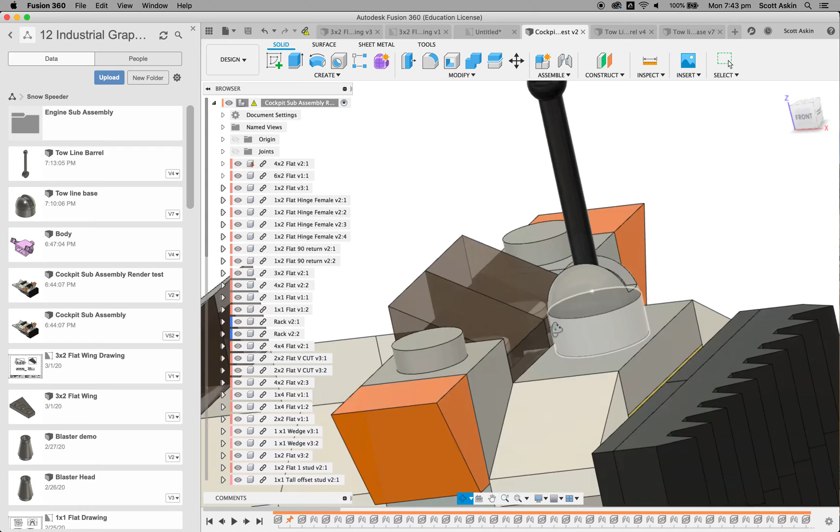This one's going to show how we draw the second part to this, and I call it the tow line launcher. Just go back to the assembly here. You can see there it is on the back of my snow speeder.

So last lesson we drew this base section here in white, and now we're going to draw this. I'm going to call it the tow line barrel in black. So we need to draw that individually. You can see here's one I've drawn before, and if we just use the timeline once again to roll back, you'll see how I went about drawing this to give you an idea. Grab the timeline, move it back one, you can see that I'd revolved.

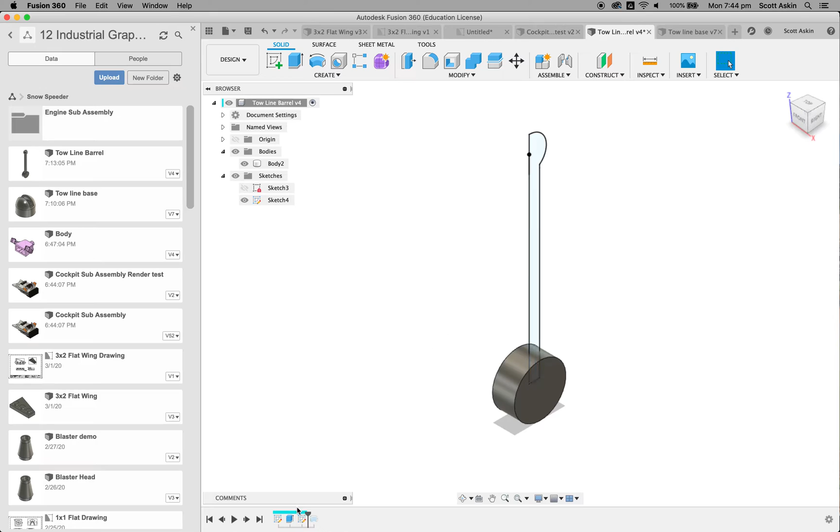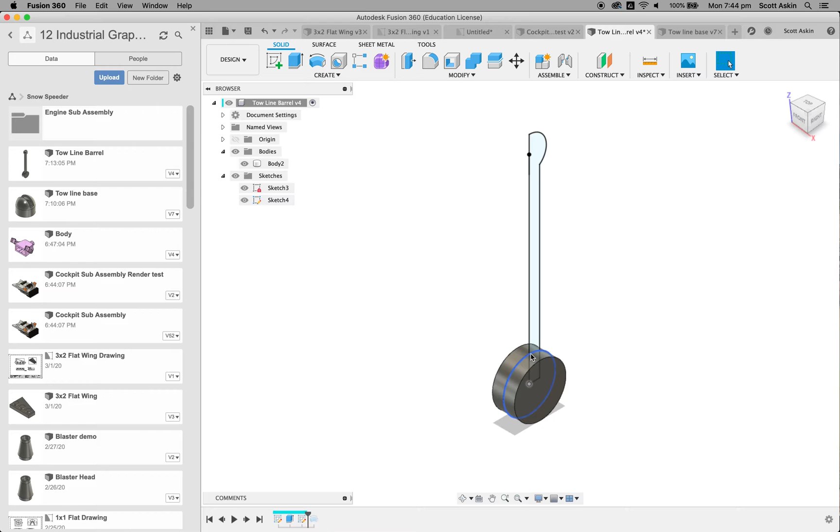That might be better to go right back to the beginning and show you where I started. I'll just turn the sketch on. So I started with a circle, then extruded it, and you'll notice I extruded it in equal distance both sides of the original sketch. Then drew another sketch on that same plane through the center, and then revolved that sketch to give me the barrel shape.

So we'll do exactly what I've just done there with a new design. Let's go File, New Design. Straight away let's save that thing. What do I call it? Tow line barrel. That sounds good. Make sure it's in the right folder.

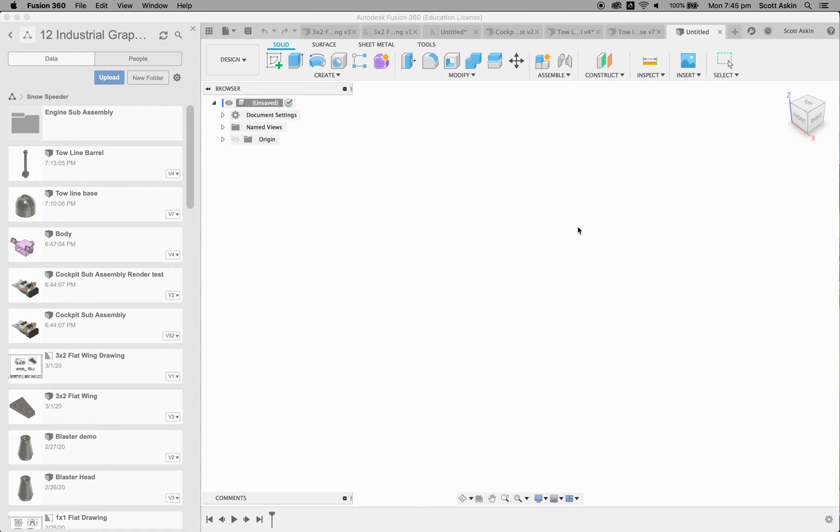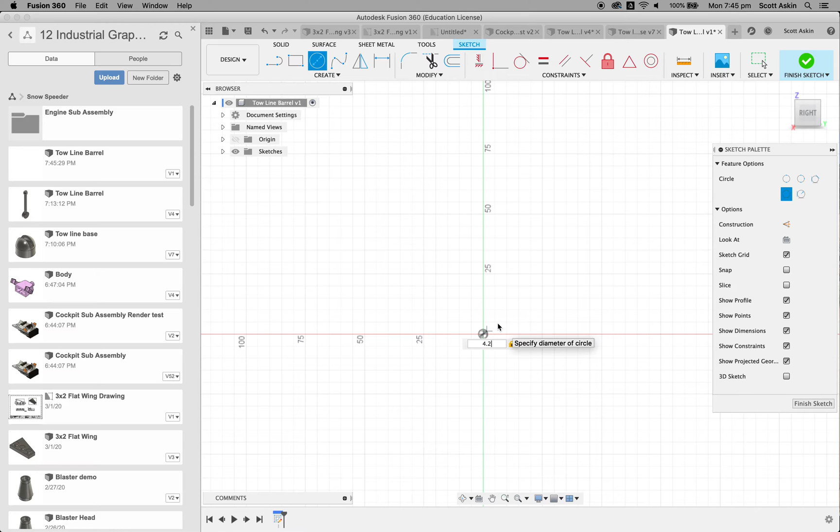Click on Save and go to your sketch icon and choose the vertical plane, and let's put a circle on there. Always start in the center and drag it out, and I can tell you that the diameter of that circle down the bottom of that cylinder is 4.2. So punch that in, and then zoom in on that so you've got the right sort of scale, and then finish that sketch.

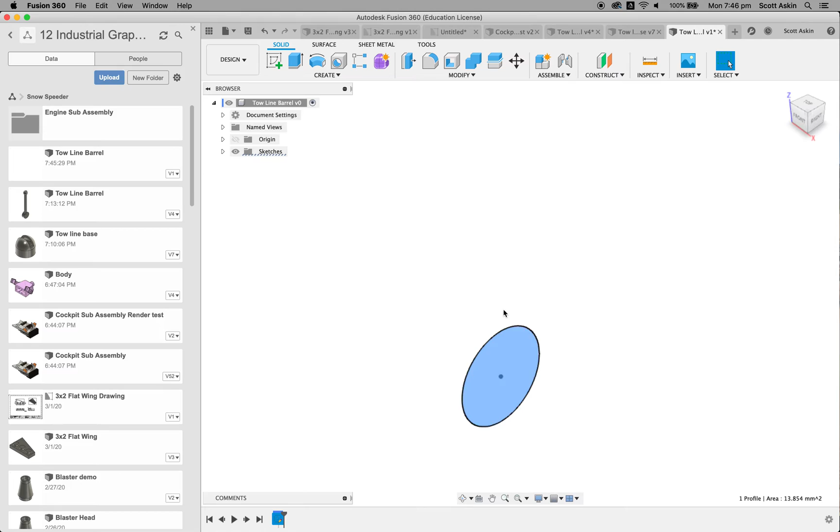I always like to go to 3D view by clicking on home there, and we're going to now extrude this circle and make a cylinder, but because we're going to be drawing on the center of this later on, rather than extruding it like left or right, we're going to extrude it symmetrical, so the same amount left and right. So select the profile, come up to the extrude button like you normally would do, and when you come to this part about direction, change it from one side to symmetrical.

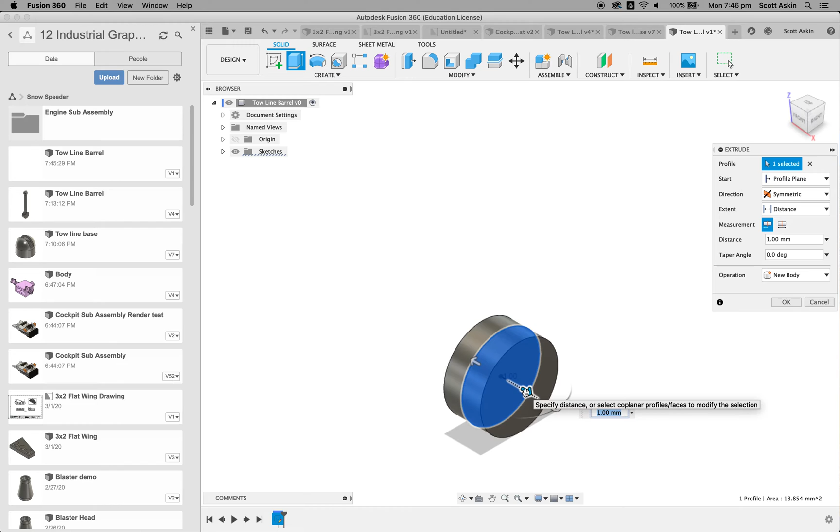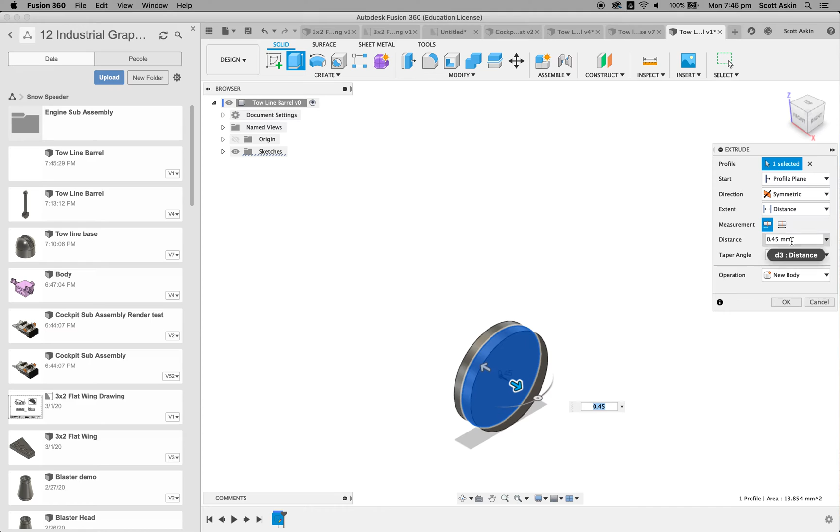As you can see here, as I move the arrow on one side, it repeats the same on the other side. So to give us a thickness in total of 0.9, that's going to be 0.45 in distance. So 0.45, I think that's going to give me a distance of 0.9, or is that the overall distance? Now let's see if it's fine. Let's see what happens. Yeah, okay, let's try that. So I'll click enter. I think that's the right size.

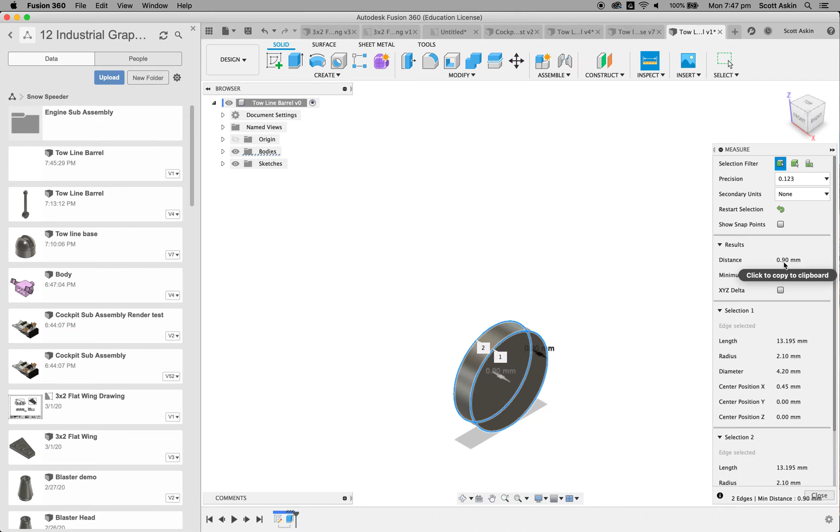Let me just check. So we go to the inspect tool here, and then I can click onto this circle to this circle, and it tells me that that distance is 0.9, which is correct. So there's a really handy tool to use, the inspect tool. Inspect, measure. Don't worry about all those ones down here, but that's a really handy tool. You can measure stuff on the fly.

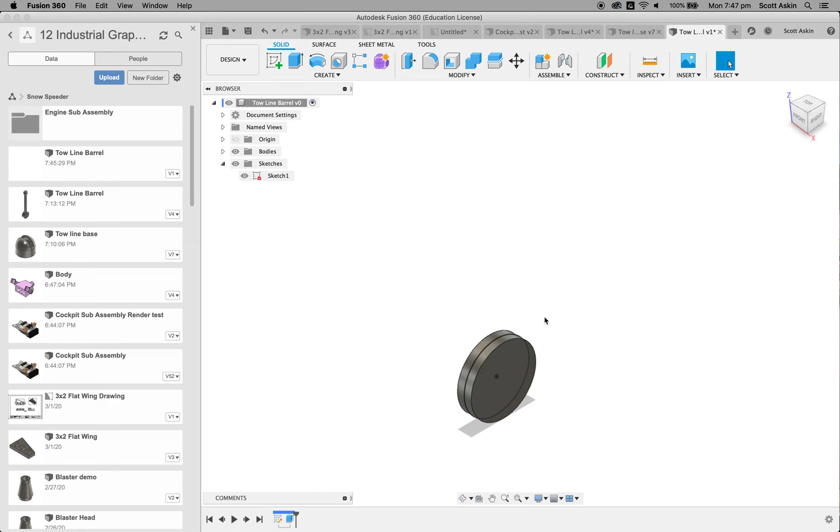Alright, so there's the first part of that cylinder. I might just turn that sketch back on so I can see. And the reason I turned that back on, by going to sketches and you turn sketches off and on, you can see now the black line, I should say, which represents the original work plane.

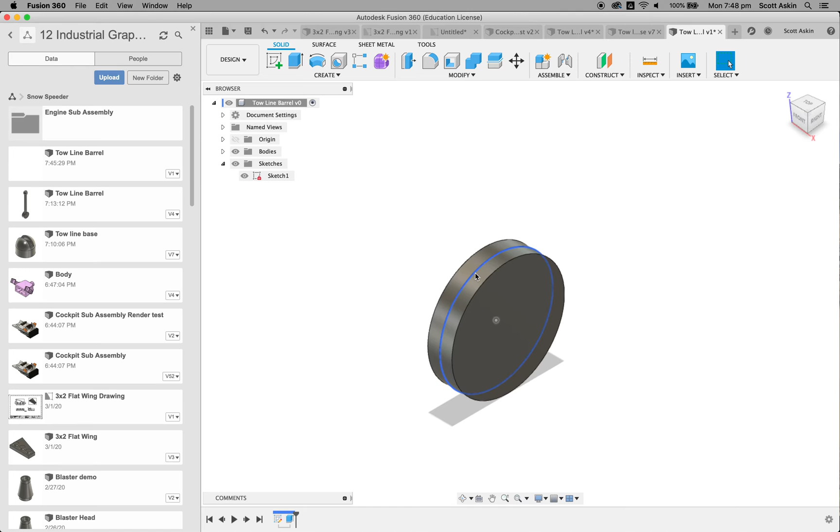So now I'm going to draw the second part. I'll start back to the one I've already finished, and you can see we started off with this thick cylinder, and then we've revolved this other section on top of it. So if we go back to our drawing, let's choose the plane in the center like so, click on sketch, and let's start putting in a profile that we can revolve to create the barrel shape.

So using your line tool, come from the center of the object and come up a distance of 16 millimeters, the length of that line. And on the end of that line, I want you to put in a circle with a diameter of 2.8.

Once again, all these sizes I got by measuring the object with calipers. So a diameter of 2.8. Remember, this works always in diameter.

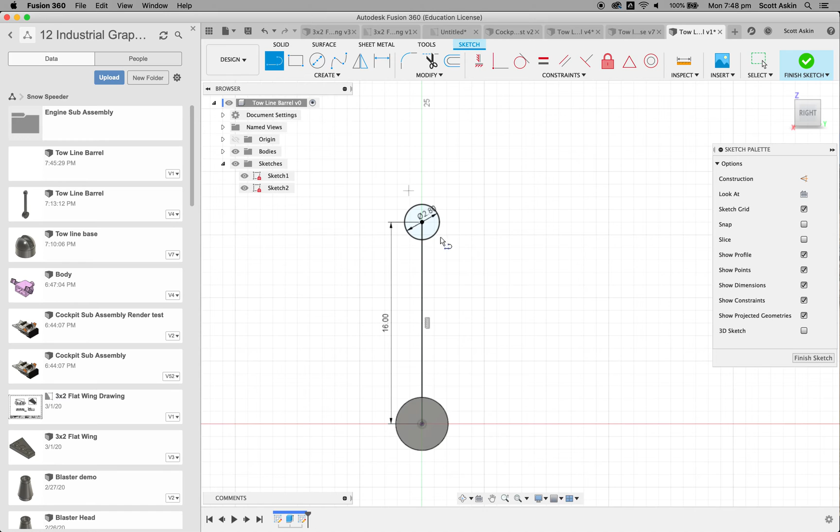I'm going to draw another line parallel to the first line, starting it somewhere down here in space. Actually, I need to draw a line a certain length here first. So draw that line in, find out what dimension that line is, and set that dimension to 0.85.

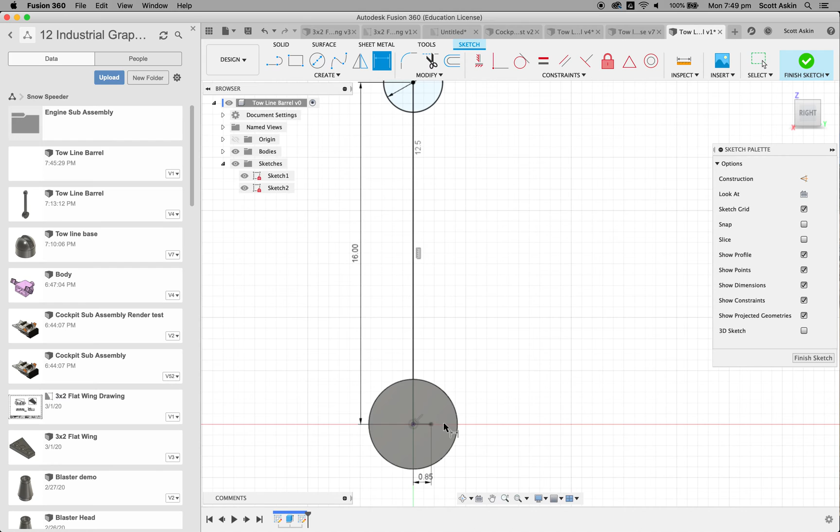From the end of that line, click once, then come up and let it snap onto the edge of the circle. You can see that cross comes up, which means it's snapping to it, and that should be sufficient.

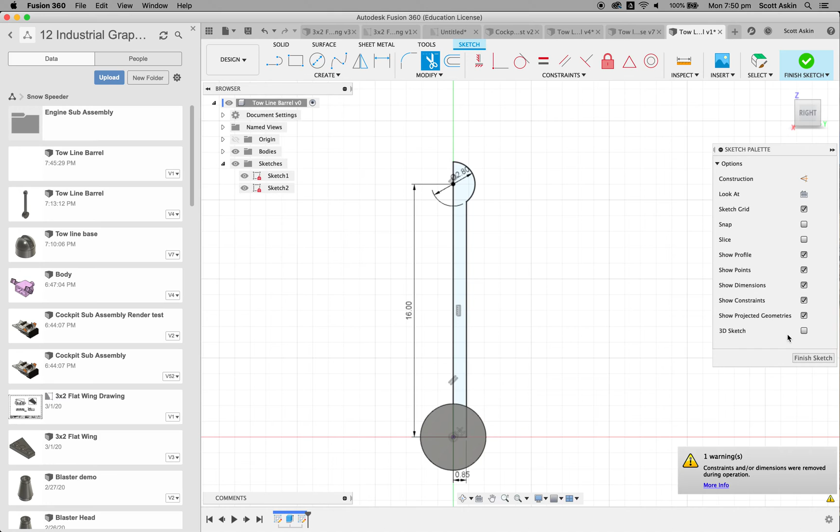Now what we need to revolve here is only half of the object. So I'm going to continue drawing another line from the center of the circle to the top of the circle, then use the trim tool by pushing T. I'll get rid of that half of the circle and this little section inside here, which leaves me with this closed profile which I can now revolve. So we'll finish the sketch at that point.

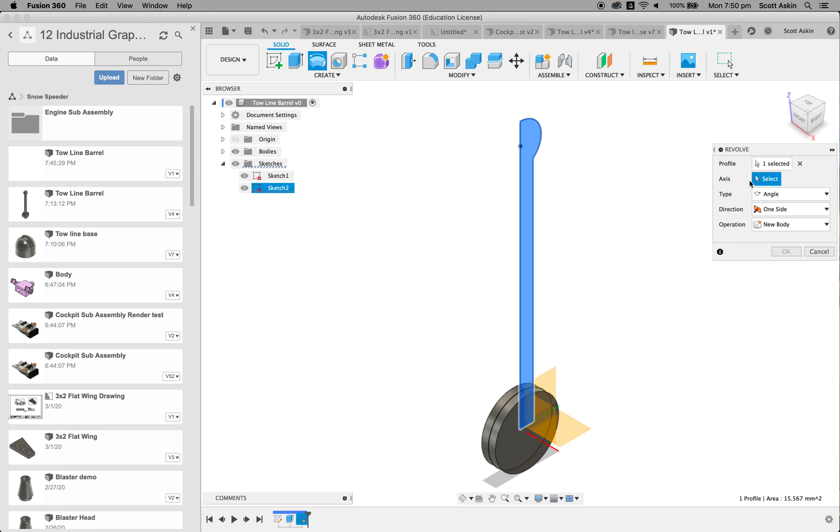I like to turn things 3D, and you can see there's the sketch. I've highlighted it, come up to the revolve tool like we've done before, and it's asking for the axis. Now you can see the profile has been selected.

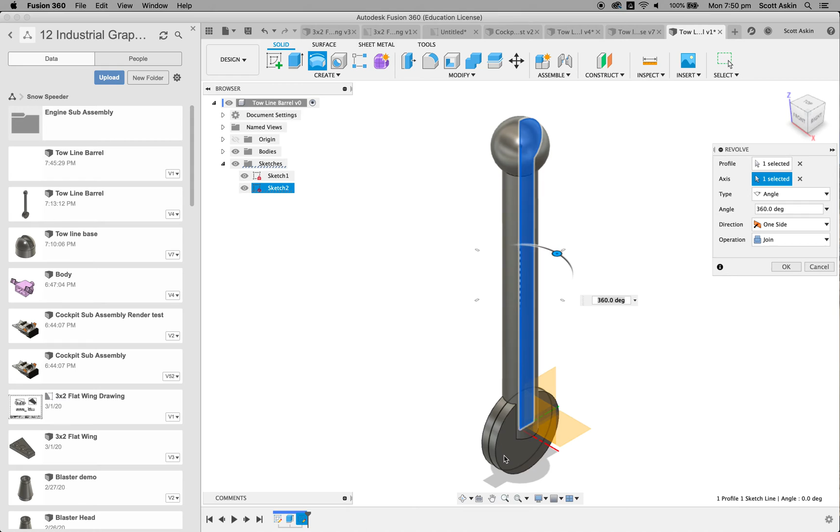Click into the axis box and choose that center line as the axis. It gives you the preview in red. At the moment it's saying cut, but we don't want it to be cut, we want it to be joined, which changes it from red to that blue and grey colour. I can see I've got an error with my original cylinder - I'll have to go back and fix that later on. So click OK.

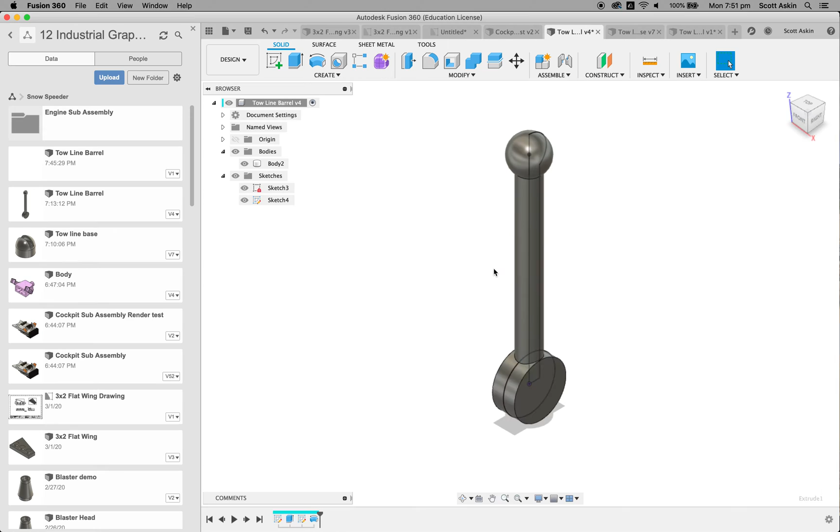The barrel's part is correct, but looking here, that cylinder down the bottom is definitely not the right width. So I'm going to go back to my drawing to find out what width this cylinder was, back to that extrusion. Actually, better still, rather than do that, I'm going to measure it. I'll click on one side, click on the other, and if you look at the distance, it's 0.9. So there's my mistake - that was 0.9 from either side, 1.8 in total.

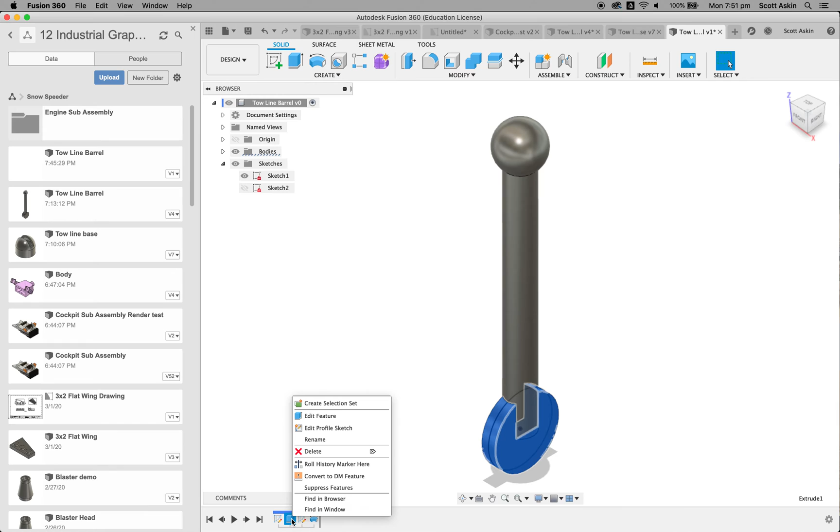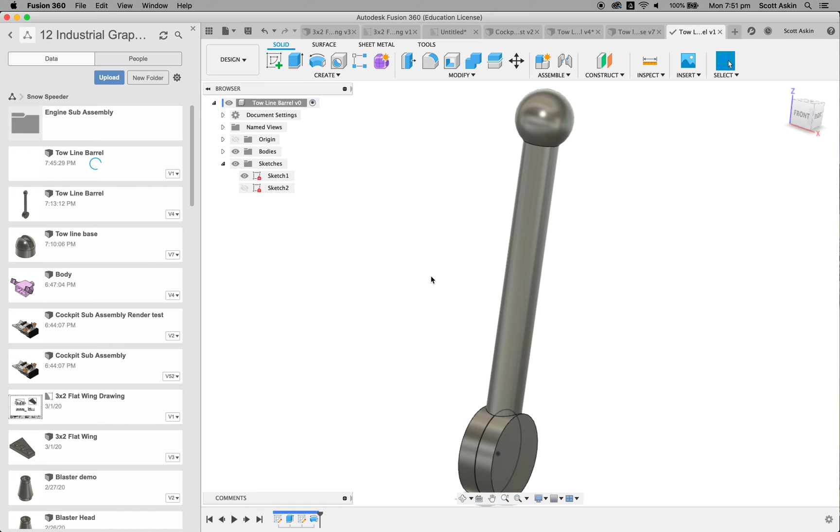So I need to edit this extrusion here now. If I go back, you can see I'm highlighting the extrusion in the timeline. I right click, edit, and up here, instead of it being 0.45, it needs to be 0.9. Click OK, and now we can see we've got the correct thickness. Alright, so hit save, and that's that part done.

We might as well just assemble these now together so we can put them both together. So to create a sub-assembly of two parts, you always start with a blank file. Never start with the part you've just drawn and add parts to it, because it won't arrange those correctly in the drawing. So file, new, so you've got a totally blank page if you like.

Then come over to your library and right click on the parts that you want to insert. So right click on the tow line base, insert into current design. Okay, it's asking me to save that before I can insert it, so I just need to find it up here. There it is. I hadn't saved it. Oh okay, maybe I had saved it.

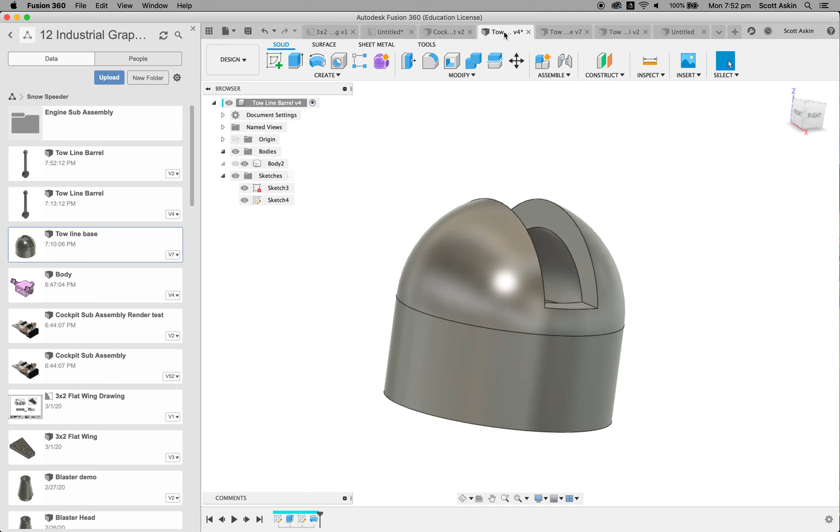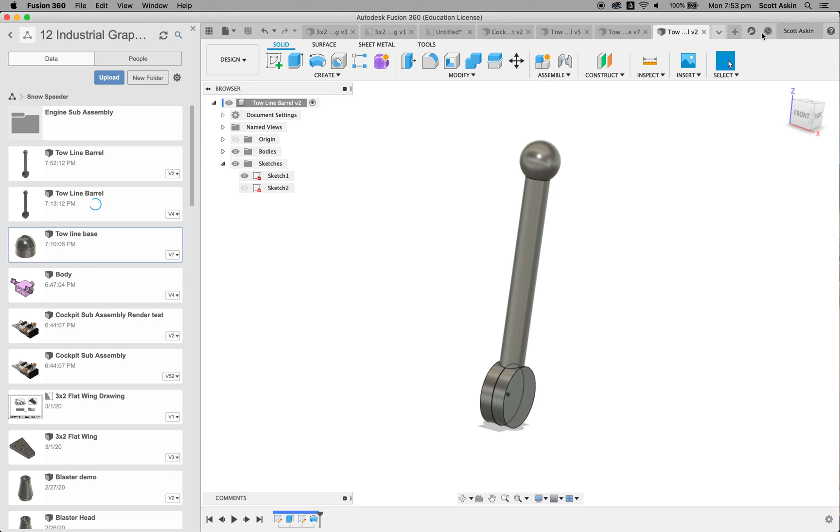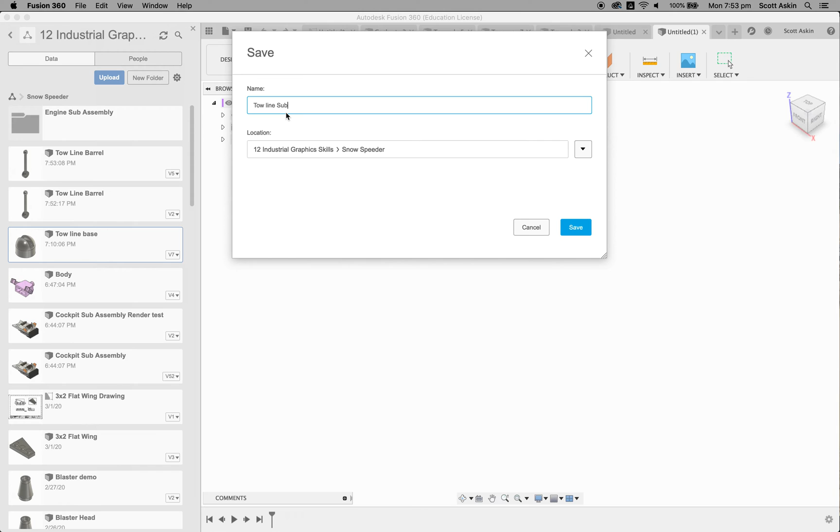Let's click on save there to make sure all these parts are saved. It says that's saved, that's interesting. I might hit refresh to see what's going on there. I'm just going to go back to the untitled view - oh, I had to save that first. So click on save and give it a name. I'm going to call this tow line subassembly. It's not a complete assembly, it's a subassembly. Click on save, gives it its name.

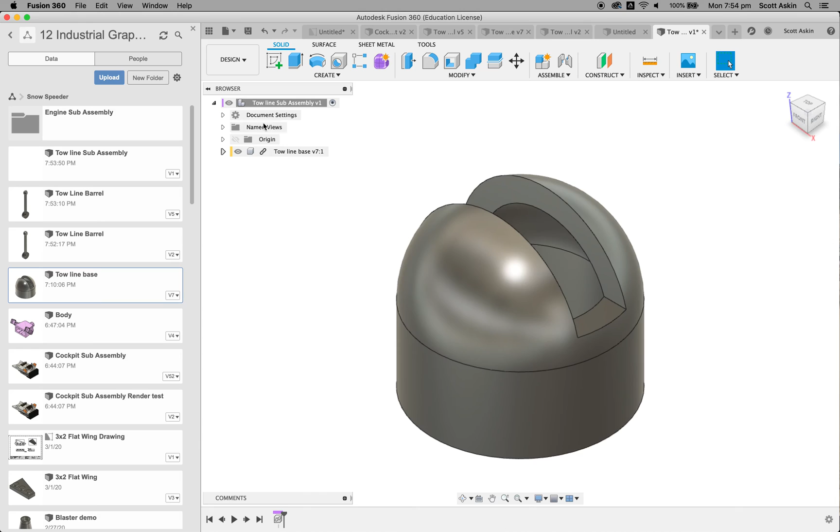Once we've named it, now we can add these parts in. Right click on the base, insert into current design, give it a few seconds. There's the base. You can just leave it as is and click OK. But to stop this base from moving around, select it in the file tree, right click, and the first option is ground. Ground means that it puts a little pin onto it, and it's going to stay in space, so the other part will then come onto it if it's in the correct orientation.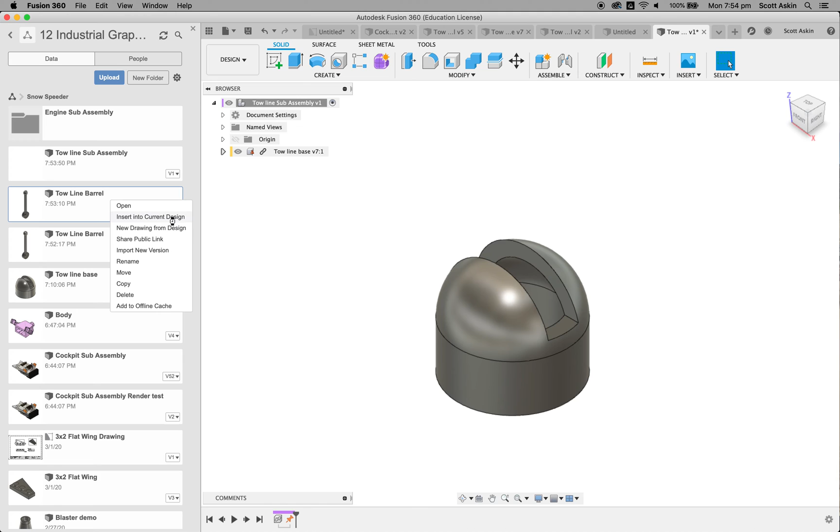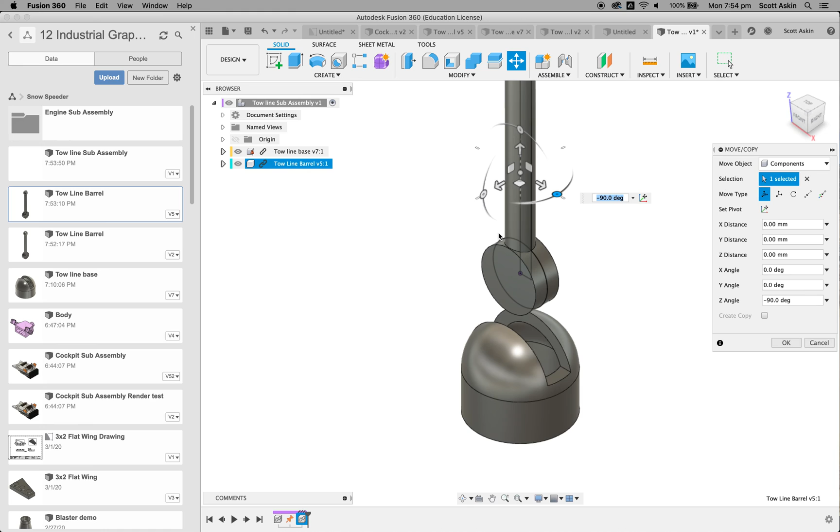Deselect everything and then come over to the barrel, which looks like I've got two there. I'm going to take my second one, insert into current design, give it a few seconds for it to grab it off the cloud. What we want to do here is move the object so it's almost in the correct position to put a joint between the two of them. Using the different handles, I'm going to rotate this around 90 degrees, and you can see now these are in the correct orientation. I'll click OK at that point, and then we're going to apply a joint between the barrel and the other part.

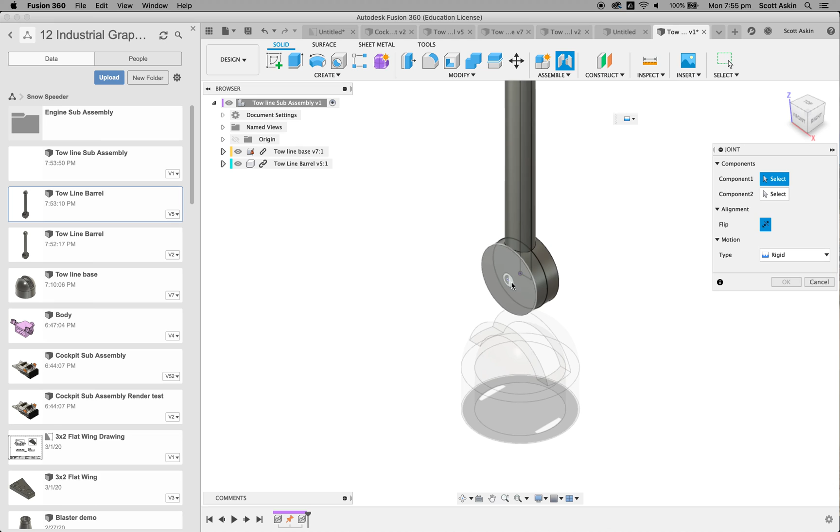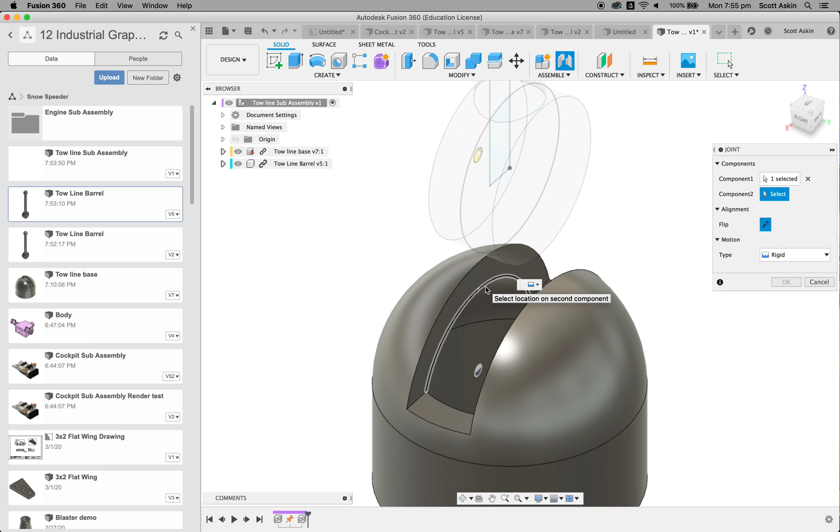So I'm going to click on joint, and it's asking for the first component. If I hover my cursor over this circumference, you'll see that a center point also highlights. It's going to locate this object onto here via the center point, and you can also see on the base I've got a similar circle drawn. So if I hover there, go to the center, click once, and then use my orbit tool to find the center of this circle here. As I move my cursor around, jumping to different spots, I'm going to zoom in, and you can see there, as I hold my cursor, the center of that circle has now become selectable. So we click onto that, and you see now it lines up those two.

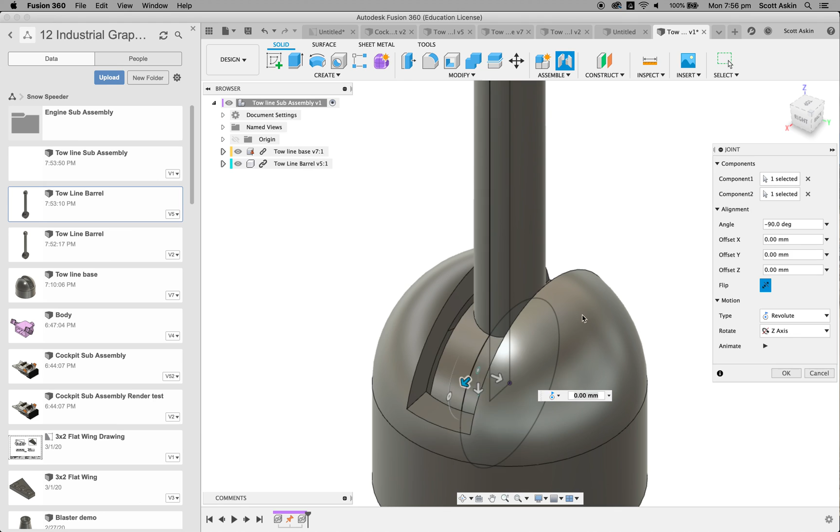At this point, the type of joint that's chosen is rigid, which means we can't move it or anything like that. What I'll get to do is change it to revolute, and you can see it gives you a preview of the angle that you can revolve it between. So I'm going to grab that little revolve tool and bring it down here, like it was going to be firing at the back of my snow speeder. You can change things like the axis it revolves around and so on, but everything else should be pretty right.

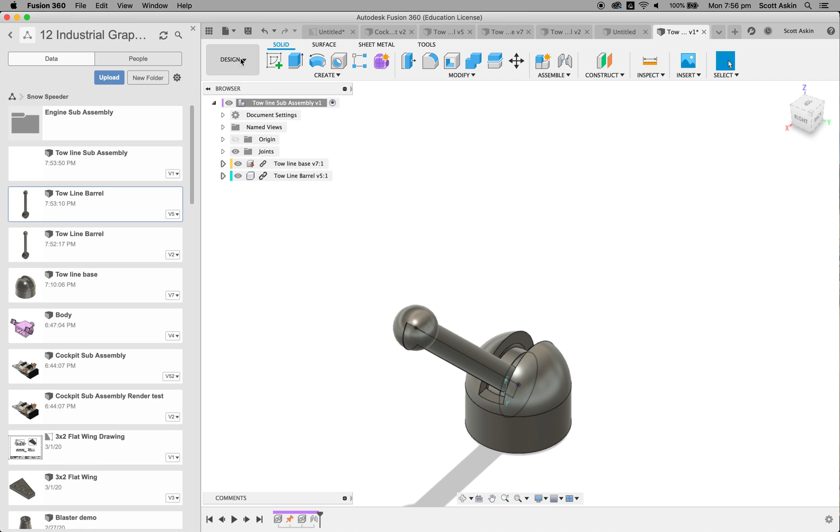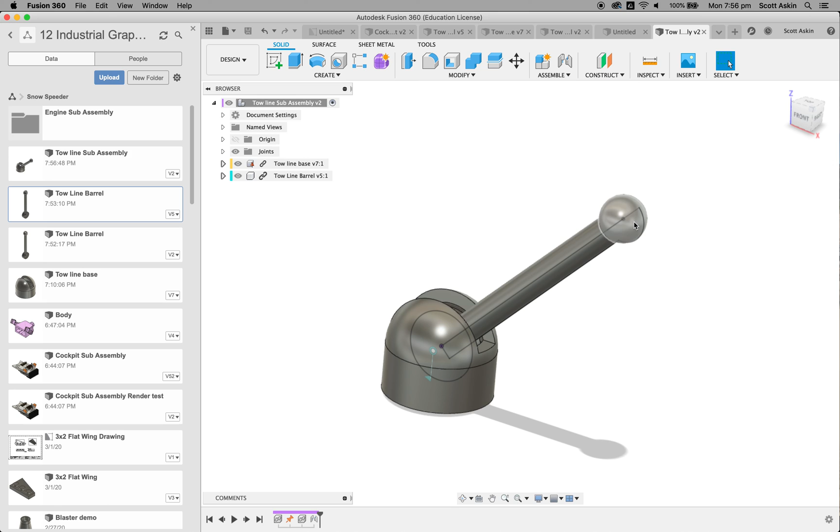Click on OK, save it again of course, and you are then ready to put that onto your main construction, or your main part I should say. So that was using the combination of the extrude, symmetric, and once again drawing a profile and revolving it, and then assembling the two together.